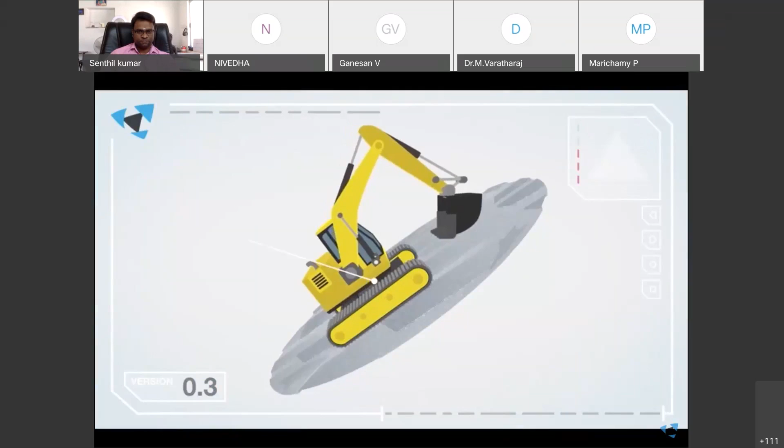You will be able to detect potential problems before anything is even built. The digital twin can be inspected and modified when necessary, and stakeholders can also get involved in the development process at an earlier stage.

The rapid development iterations that the digital twin enables will result in fewer prototypes, reduced costs, and faster lead times. Moreover, Mevea's solutions allow operators to use the simulation for training, which means they will be qualified to use the machine before it even exists.

The digital twin lives and evolves throughout the life cycle of the product. Once connected, the digital twin can analyze the machine's use and behavior in the field and provide vital feedback. This data can also be used to develop the product further.

With Mevea's digital twin software, you can develop even the most intelligent and complex machines with ease, and change the way you engineer and operate your products.

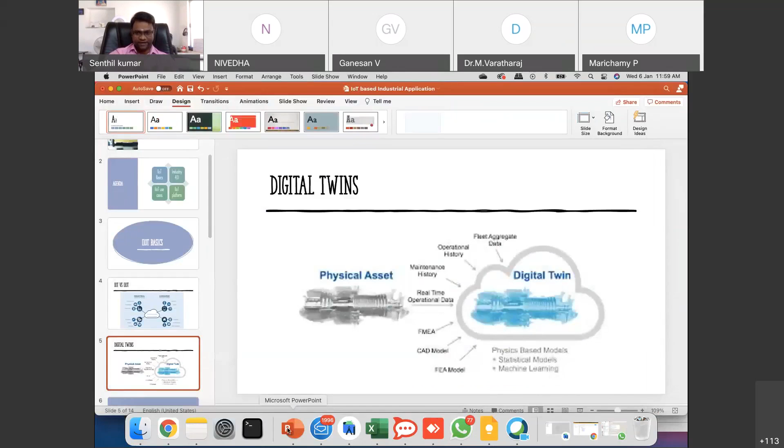So in this video, you might get the basic concept of what is a digital twin and why it is really needed. As I told, manufacturing machinery is a very complex process. You need multiple iterations of the machine. So using digital twins, you are doing every manufacturing process and testing process in software, not in the physical machine. This allows a lot of experimentation and quicker prototyping.

In the same way, in industrial IoT, when you already have a machine deployed, now in that machine we need to add some sensor, like a motion sensor or some other sensor, and we want to understand the behavior of the machine and get some data. Doing it in a physical machine is a very complicated task. That's why we are doing it in a virtual or digital machine, where we can attach any sensor and see how the performance goes. If everything goes well, then we can go to production and deploy our sensor.

So in all industrial Internet of Things platforms, you might hear this word called digital twins, so you can understand what it means. Digital twin means it is a physical one - you just clone it and put it in the software in digital form, so you can do a lot of experimentation with that.

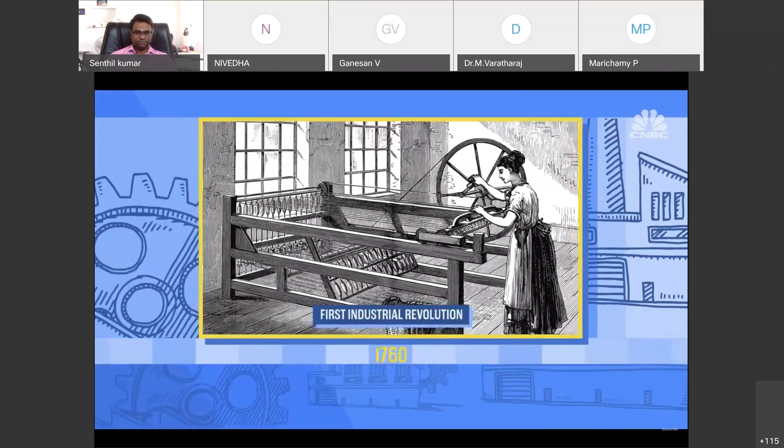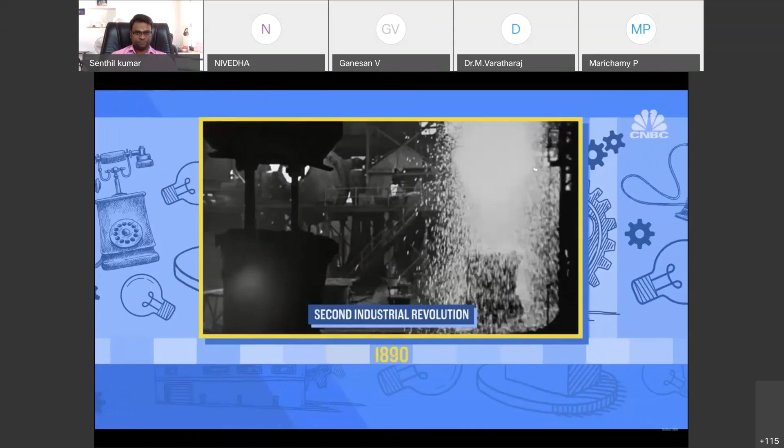The first Industrial Revolution started in Great Britain around 1760 and spread to Europe and North America through the early 1800s. It was powered by a major invention, the steam engine. The result? New manufacturing processes, the creation of factories, and a booming textiles industry. From the late 1800s, the Second Industrial Revolution was marked by mass production and new industries like steel, oil, and electricity. The light bulb, telephone, and internal combustion engine were a few of the major inventions of this era.

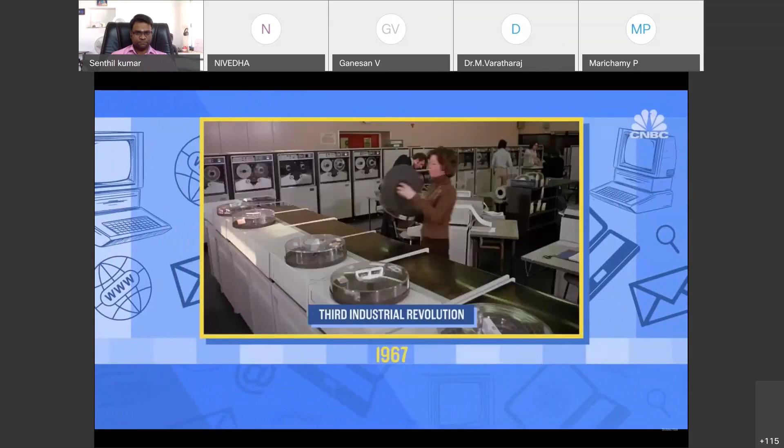The Third Industrial Revolution, sometimes known as the Digital Revolution, occurred in the second half of the 20th century. In just a few decades, we saw the invention of the semiconductor, personal computer, and the internet. So what separates the Fourth Industrial Revolution from the Third? Experts say the difference is that technology is merging more and more with humans' lives, and that technological change is happening faster than ever. Consider this.

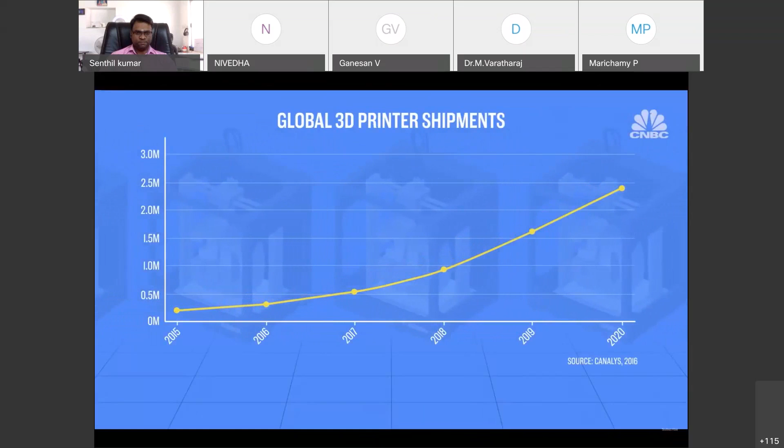It took 75 years for 100 million users to adopt the telephone. Instagram signed up 100 million users in just 2 years, while Pokemon Go caught that amount in 1 month. 3D printing is just one example of fast-paced technology in the Fourth Industrial Revolution. The industry has gone from a business idea to big business, with 3D printer shipments expected to increase from just under 200,000 in 2015 to 2.4 million in 2020. Today, you can have a hip replacement from a 3D printed bone or use a 3D printed bionic arm. Talk about blurring the line between humans and technology, right?

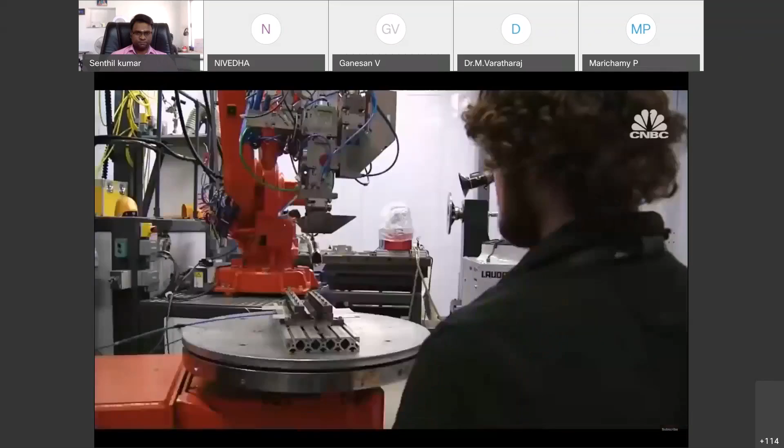Research shows innovators, investors, and shareholders benefit the most from innovation. The risk is that the Fourth Industrial Revolution is making inequality, which is already a big issue, even worse. One study found billionaires have driven almost 80% of the 40 main breakthrough innovations over the last 40 years. That's a problem when the richest 1% of households already own nearly half of the world's wealth. Experts warn we are in a winner-takes-all economy, where high-skilled workers are rewarded with high pay and the rest of workers are left out.

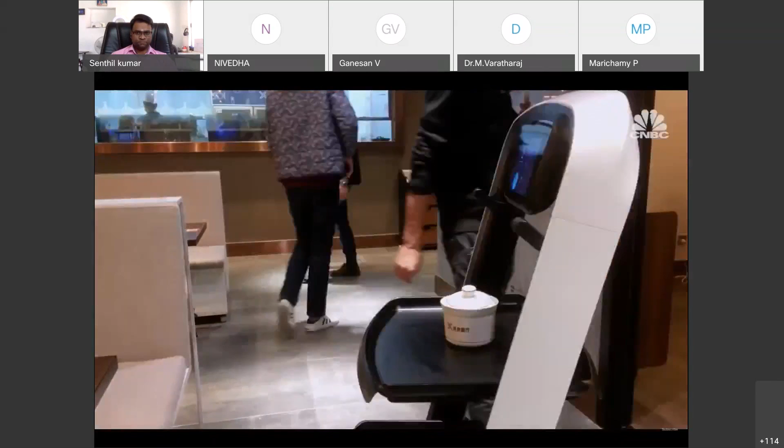Studies confirm technologies like AI will eliminate some jobs and create demand for new skills that many workers don't have. Privacy concerns are another issue as the fourth industrial revolution turns every company into a tech company. Industries from food to retail to banking are going digital, and they're collecting a lot more data about their customers along the way. Users are starting to worry that companies know too much about their private digital lives.

The World Economic Forum says a majority of leaders don't have confidence their organizations are ready for the changes associated with the fourth industrial revolution. With tech changing fast every day, it's time to catch up.

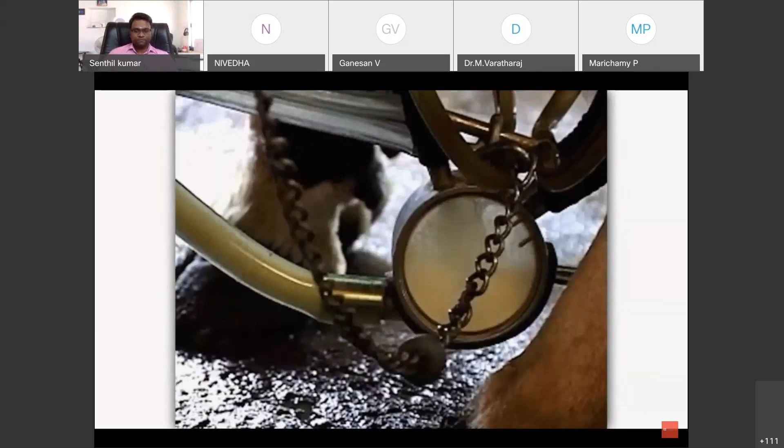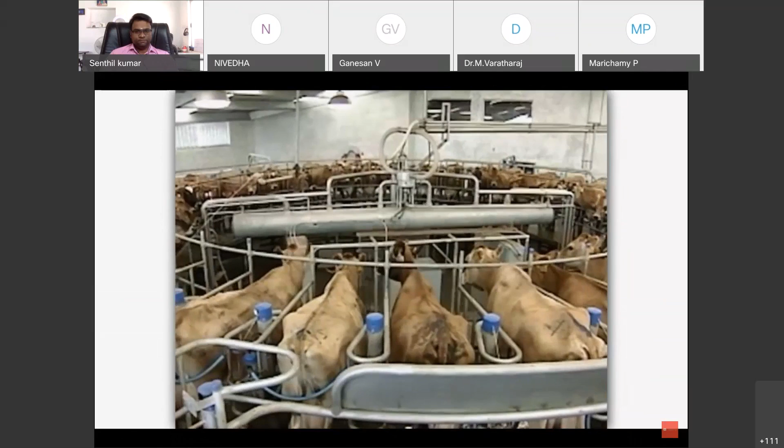The milk goes from the udder through the milking claw and is piped immediately to a very large refrigerated bulk tank at the dairy. Milk is warm when it comes out of the cow, about 100 degrees, but is quickly cooled to about 40 degrees in the bulk tank.

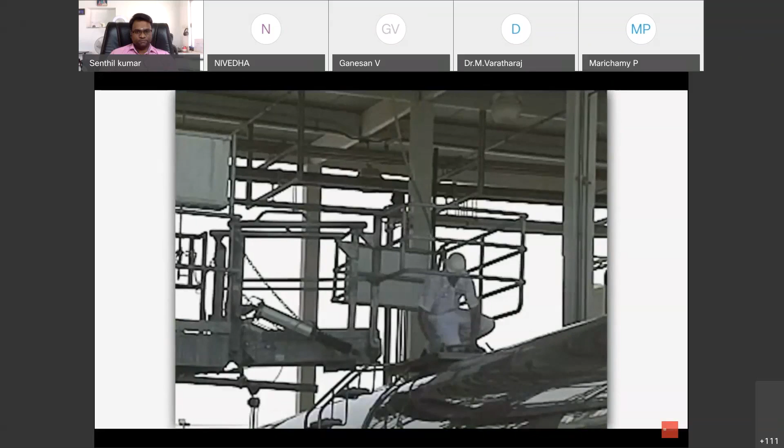The milk is loaded each day into a large truck that transports it to a processing plant. Milk is tested for safety and quality before it goes into the truck and again when it arrives at the processing plant. The milk is then pumped from the truck into the processing plant.

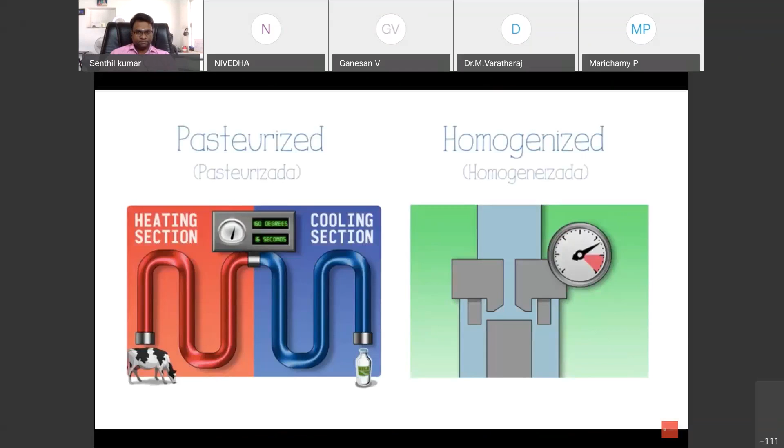At the processing plant, milk is pasteurized and homogenized. The pasteurization process heats the milk to 160 degrees for 16 seconds to keep our milk safe. The milk you drink at school is always pasteurized.

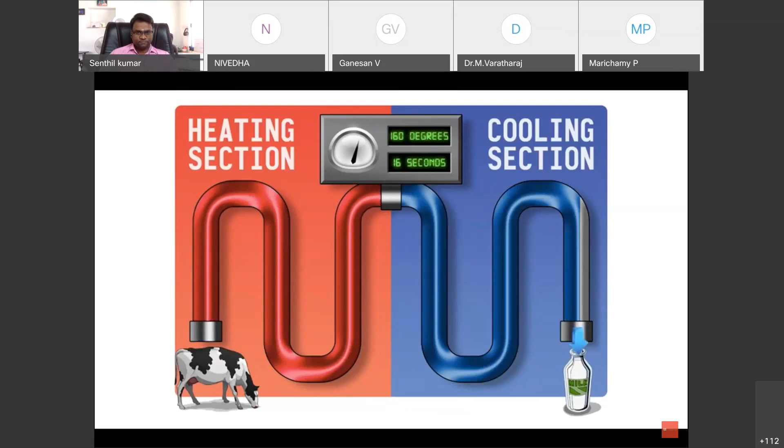At the processing plant, milk is also homogenized. This means milk is forced through small holes to break it into smaller particles. If milk is not homogenized, the cream will separate out and float to the top.

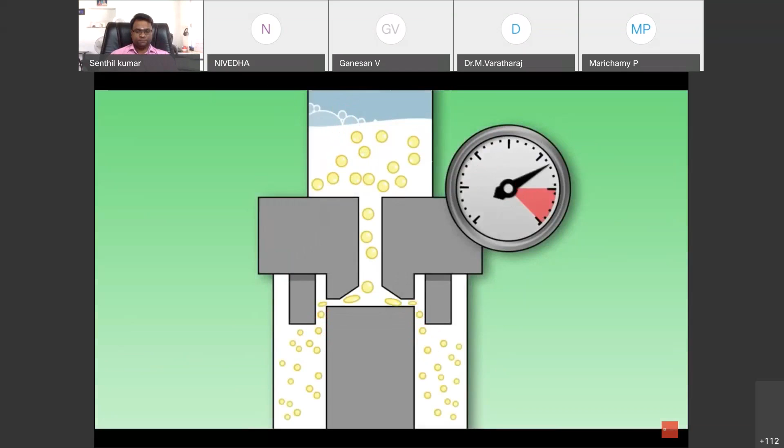Finally, milk is packaged into bottles and cartons or made into other dairy foods you love, such as cheese and yogurt.

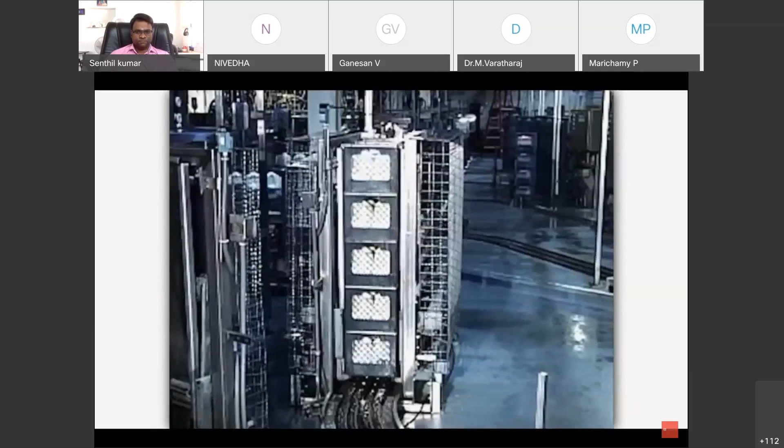Boys and girls, what did you learn about processing? The milk is transported, milk you drink at school.

Okay, so here you need to understand. In the slide I have shown different tanks, right? So when they collect milk from a cow, the temperature of the milk is 100 degrees Celsius. When they're readily collecting from the cow, it is like 100 degrees Celsius.

Now you can't transport this at 100 degrees Celsius, because the problem is it's a good temperature for bacteria to increase. So what they will do is reduce the temperature from 100 to 40 degrees Celsius at the collection point, and then it will be put on the trucks. So now the temperature of the milk is 40 degrees Celsius.

This milk is taken to the industry. Now the milk temperature is 40. The milk will be put into the tank, which is a 40 degrees Celsius tank. Then the milk will be sent to another tank, which is a heat tank.

In the heat tank, the milk has to be put at 160 degrees Celsius so that it will boil properly. But the condition is it should be maintained for only 16 seconds. If it crosses 16 seconds, you can't use that milk.

It means the milk is already made for home use. See, when we buy milk, what we do is boil it for more than 100 degrees, 150 degrees Celsius, for a longer time, not 16 seconds but longer. Then we start consuming that milk.

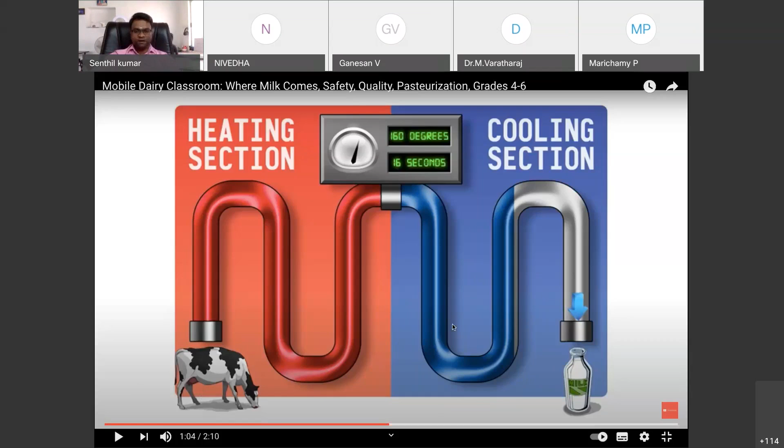Now, the challenge here is for the industry, which is a very famous milk industry in Tamil Nadu. So for them, what is the challenge? Let me tell you.

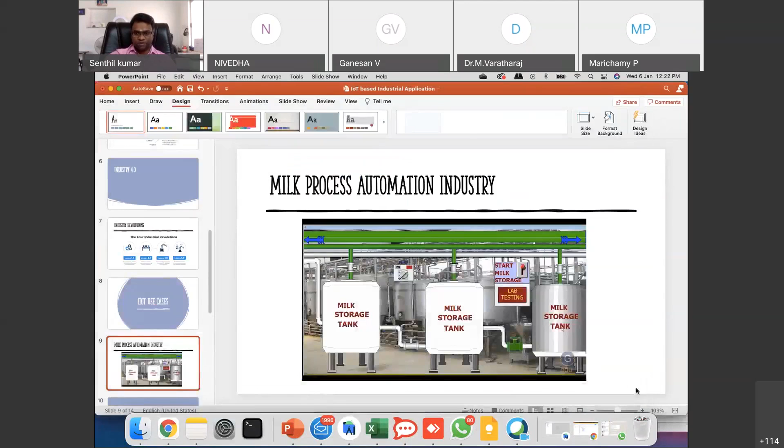Okay, so they put human resources for everything. That means when the milk in the first tank is at 40 degrees Celsius, the pipe brings the milk and fills the tank. So someone, as a human, has to stand in front of that, and his role is continuously watching that the tank is completely filled. When the milk starts overflowing, he will go and stop that inlet, so the milk doesn't come in anymore.

And this is a very manual task. Someone has to wait and watch the tank fill. But this tank is almost 15 feet high, so you can't even go up top to see it.

So what people will do is simply turn on the switch. Milk is filling, and when the milk comes out, they'll turn off the switch. So on that side itself, they are wasting a couple of liters of milk, because they wait until the milk comes out from the tank. Then when that is done, they'll keep it for some time, almost 1 or 2 minutes.

They will keep it in this tank, then turn on another tank, so the milk will come from this tank to another tank, which is a heat tank, where the milk is kept at 160 degrees Celsius. They wait for the tank to get filled, and again the milk will overflow, so they say okay the milk is overflowing, and they turn off the supply.

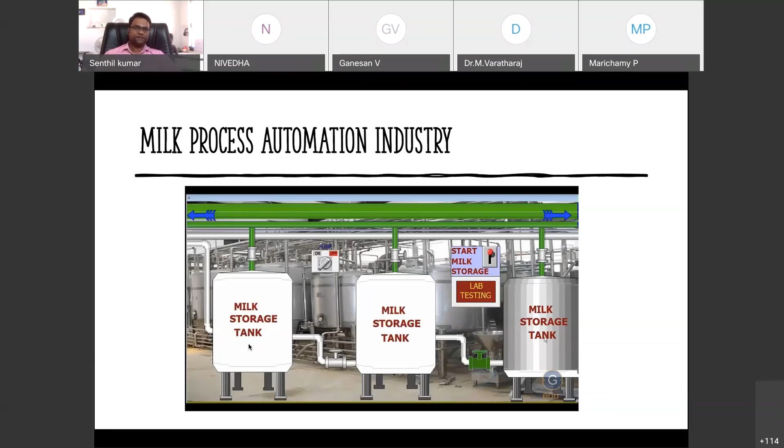Next, I will remind you what we have gone through. First we studied the difference between Internet of People, Internet of Things, and Industrial Internet of Things. Internet of People is for us to communicate with each other using the Internet. For Internet of Things, consumer devices like smart bulbs and smart refrigerators communicate with each other, we term it IoT. Heavy machines, like tanks or sensors in an industry, if they communicate with each other, we call it Industrial Internet of Things. That's what we studied initially.

Next we understood what the industrial revolution is. Industrial 1.0 is all about the steam engine. Industrial 2.0 is about electricity - we invented electricity, and the same motor that operated on steam engines we converted into electrical or oil-based motors. The third is the software revolution, where we did a lot of automation by writing software code, automating the manufacturing process. And the fourth is IoT, machine learning, AI, which helps us do a lot of autonomous tasks and real-time monitoring, and importantly, increase productivity. This is what we studied about Industrial 4.0.

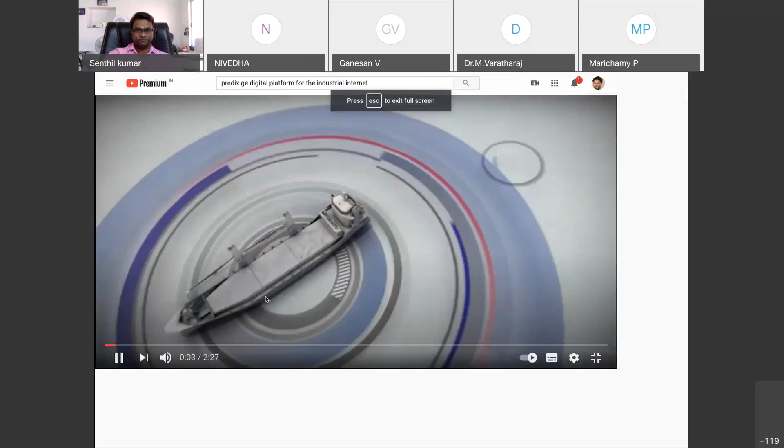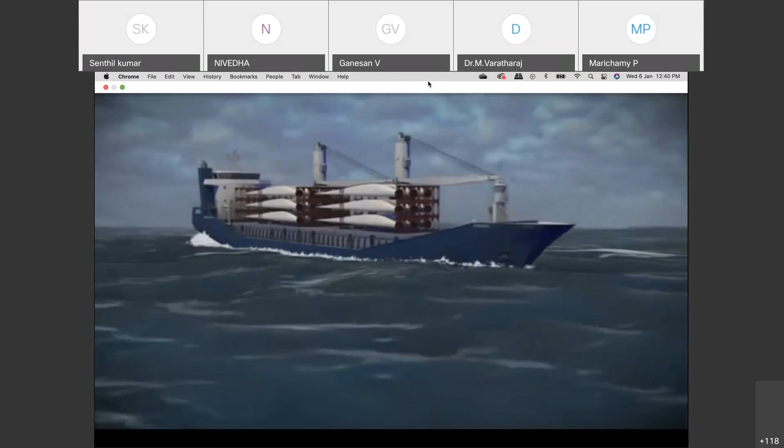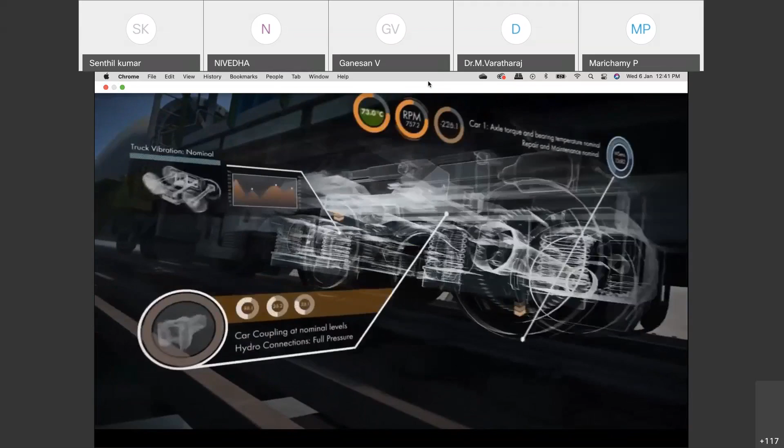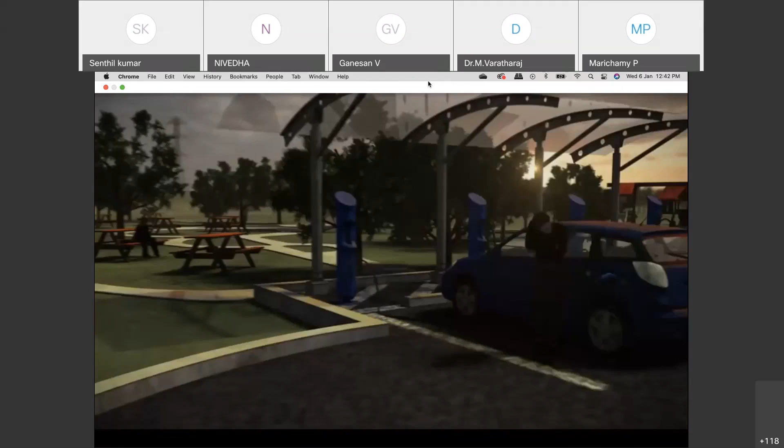There's a whole new internet at work. Machines communicating with machines, sharing a wealth of data seamlessly, tirelessly, behind the scenes. Forget real time, this is between time. Machines moving industry forward at lightning speeds. Welcome to the industrial internet. Out at sea, a large cargo ship traverses the giant waves, carrying parts destined for a far-off wind farm. Tiny sensors throughout the engine ensure everything is working properly. They report back on propeller performance and power output. Other sensors above deck monitor the ship's precious cargo and confirm its condition and safety. The ship's tracking data determines the destination and arrival time. Everything checks out. The cargo is now traveling securely aboard a hybrid evolution powered freight train. Inside the cabin, the engineer calls up a status report on the entire train. Real-time slows. Between time, a vast universe of data is collected and interpreted. In the blink of an eye, sensors calculate engine temperature, fuel efficiency, speed, weight, and vibration patterns. At the same time, sensors in the track relay the train's location to the network, where information from all other trains comes in. This gives the network the ability to coordinate movement and optimize efficiencies throughout the entire system. And our train remains on schedule. Meanwhile, at a nearby wind farm, a new turbine powers up for the very first time. Within seconds, tens of thousands of data points are analyzed, and the farm controller delivers operating instructions to the turbine, bringing it up to speed with the rest of the farm. Leveraging thousands of hours of stored data, the farm automatically calculates how to increase and decrease individual turbine output. The turbine can tailor the pitch of its blades to capture just the right amount of wind. As the farm responds to the demands of the power grid, it delivers energy as instructed. Next, the grid carries precise amounts of energy to a network of local charging stations. Drivers can charge up and head home. This is the industrial internet. Brilliant machines providing the insights to make better decisions.

So this is some of the use cases of how GE is using this technology. Next we will see their platform, which is called Predix. This is their platform, it's the same as yesterday we saw with AWS. It's similar to AWS, but it's their own platform, specially designed for industrial IoT.

My name is Wes Mukai, the CTO, Transportation Digital Solutions. Now, I always get asked two questions: what is a platform as a service, and what is Predix? So I thought I'd take a few moments and answer those questions for you.

Now, if I contrast that to a wall built in Legos, let's assume it's the same strength, but it's going to have a more structured pattern. I don't need special skills, I can use childlike skills to build a wall. If something breaks, I think I can figure out how to take it apart and put it back together again. So it may take longer, but it takes less skill to build.

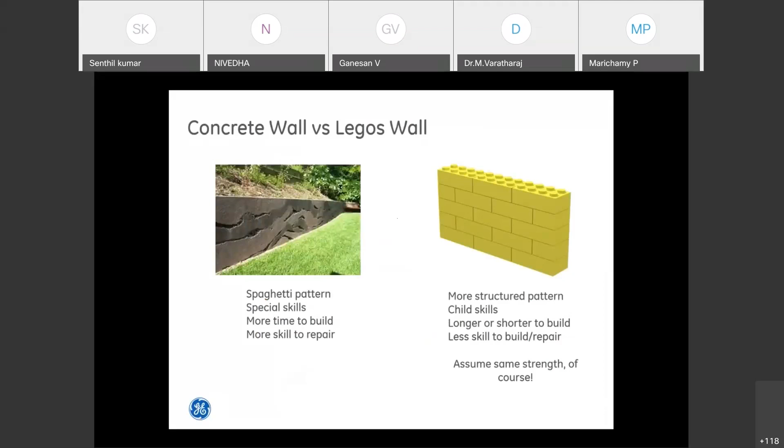Now let's think about those walls in terms of software. First, let's look at the concrete wall. I can think about all the different layers in this intricate wall as being different layers of software.

Top layer could be an application. Middle layer could be a database, a piece of middleware, like an enterprise service bus. And all the different shades and colors, you can think of those as being different types of languages, like Java, etc.

So if I think of Legos as software code, I can think of each Lego brick as a service or a microservice. It's a self-contained program. It could be an application, it could be a database, it could be a piece of middleware.

And I can think of each color as different colored Lego blocks being different languages, be written in Java, it's red, say blue would be Python, or it could be Golang. And I could have each block be a self-contained microservice.

So now if I want to build and deploy an application using these Lego bricks or microservices, let's say I could take them all and magically throw them on top of a machine. I'm going to call it the magic platform as a service machine.

Now in that platform as a service machine, there could be some software underneath there to prepare and run some of the software programs. There's actually some hardware underneath there. But I would take all these different color-coded applications or microservices and throw them into the top of this machine. And then what would come out the other side would be a fully formed wall, or an application.

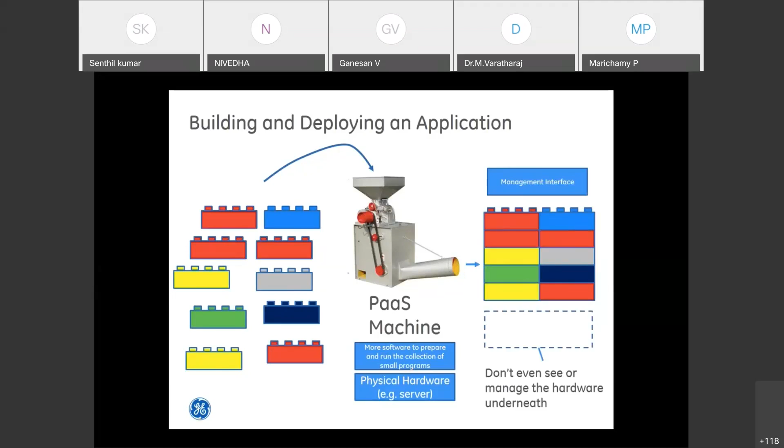But let's say if I want to change something. Let's say I have a wall that's fully formed, but you know what, the light green brick, I'd really want to have a dark green brick in there instead.

All I'd have to do is get my developer to program a new green brick. They would throw that one microservice into the platform as a service machine, and magically out the other side, the new brick would be installed into the wall.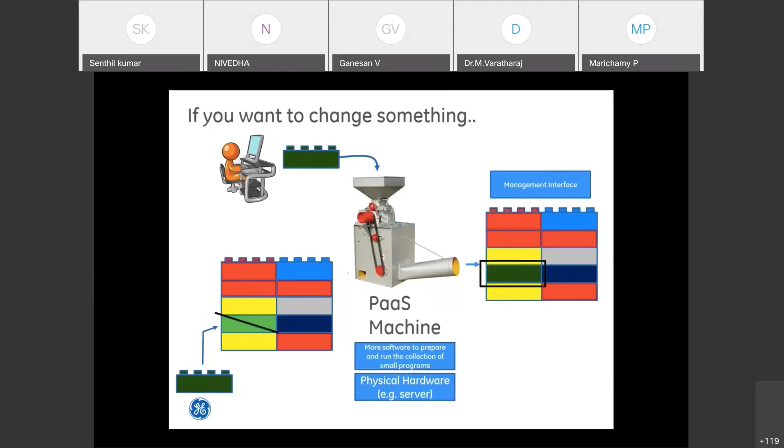And it's not like I have to coordinate with all the other developers. I don't need to coordinate with some other service owner to lift the block up and put my block in. You can do it in a nice self-contained, automated fashion.

So what is Predix? Predix is GE's cloud-based platform for the industrial internet, but this is really our platform as a service. If Predix is what we show at the bottom in terms of the cloud and applications, all the different elements on top that we just explained are really the key components of what makes up Predix. You have microservices, which are these different colored bricks, and you have a PaaS machine where I can assemble and deploy these applications in an automated and easy fashion.

So I just want to take a few moments and answer those two questions: what is a platform as a service, and what is Predix? And hopefully you have a better understanding.

Yeah, so I basically explained what he explained about Predix. See, in cloud architecture, we call something - there are three terms we usually use: platform as a service, infrastructure as a service, and third is software as a service.

So infrastructure as a service means Amazon or Google will give their virtual machines, basically their infrastructure, in the cloud. So I can install the computer, I can install the software in it, everything. I only need their infrastructure and I can do whatever software, hardware I want, I can completely do myself. So that is called infrastructure as a service.